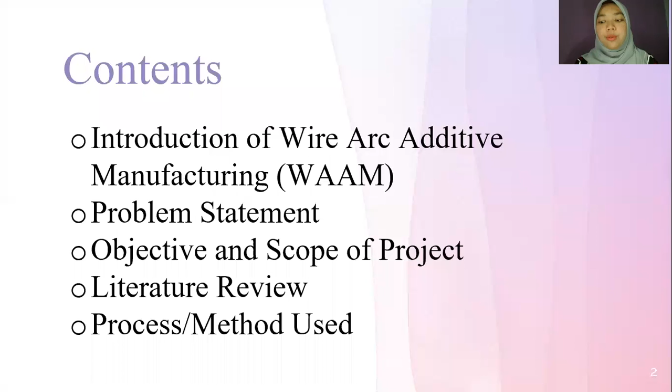This is the introduction. Wire arc additive manufacturing is considered a suitable economical manufacturing process due to its benefit in saving lead time, high deposition rate, high material utilization, and low production and equipment costs. Wire arc additive manufacturing uses metal wire as raw material and an electric arc created through the application of metal inert gas welding, tungsten inert gas welding, and plasma as heat sources.

Wire arc additive manufacturing fuses metal wire layer by layer of molten metal into components to form them by adopting the concept of discretization and deposition. In this project, I have used gas metal arc welding for deposition of 5356 aluminum alloy wire.

Gas metal arc welding is a fast growing welding method due to its high soldering intensity and the decline in post-welding cleaning. The process of part by layer is accomplished by the deposition of the molten metal wire during wire and arc additive manufacture. Thereby, melting of the wire is achieved by the arc welding process.

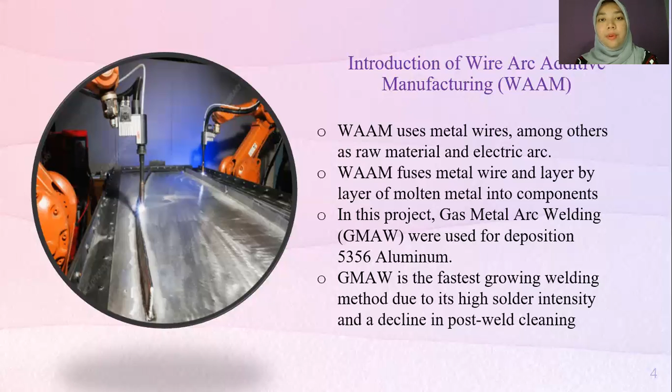Next is problem statement. The first one, in the previous study, deposition of aluminum alloy is done using rapid prototyping technique. Next, defects will have a negative effect on the surface quality and mechanical properties of the finished as-deposited part because of excessive heat.

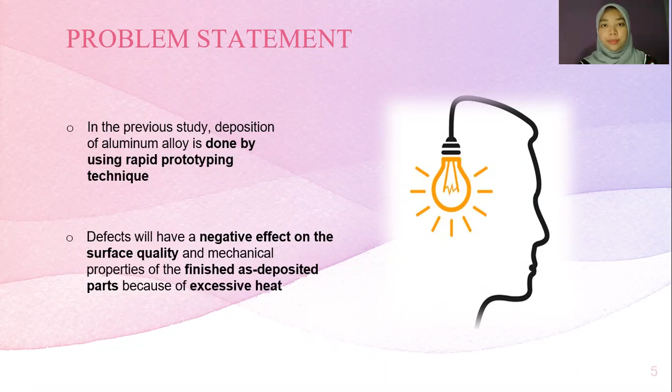So this is the objective of the project. The first one is to investigate the effect of cold arc gas metal arc welding parameters on mechanical properties and microstructure of 5356 aluminum alloy deposit, and to compare between wire and arc additive manufacturing of cold arc and conventional gas metal arc welding.

There were two materials used, a wire 5356 aluminum alloy and a base plate of pure aluminum alloy. The size of base plate used in this project is 100 mm for length, 25 mm for width, and 10 mm for thickness. The wire 5356 aluminum alloy will be deposited on pure aluminum alloy layer by layer, starting from the first layer.

Then 4 samples of layer will be recorded, which are layer 3, layer 5, layer 7, and layer 9. To identify the mechanical and microstructure properties, hardness test and secondary dendrite arm spacing will be used.

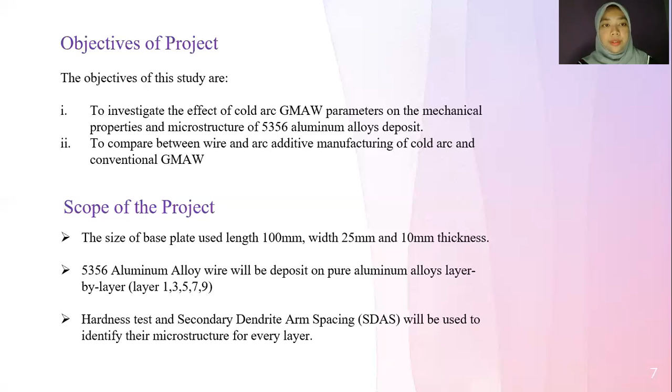Next is literature review. There are some articles that I found from the internet, and these are the most related to my topic. The first one is microstructure formation in Waspaloy multi-layer build following direct metal deposition with laser and wire, cited by Hussein et al. 2014.

Next is parameter selection for wire arc additive manufacturing process, cited by L. M. Wahsh et al. 2018. And the effect of gas metal arc welding process on different welding parameters, cited by Izzatul Aini Ibrahim et al. 2012.

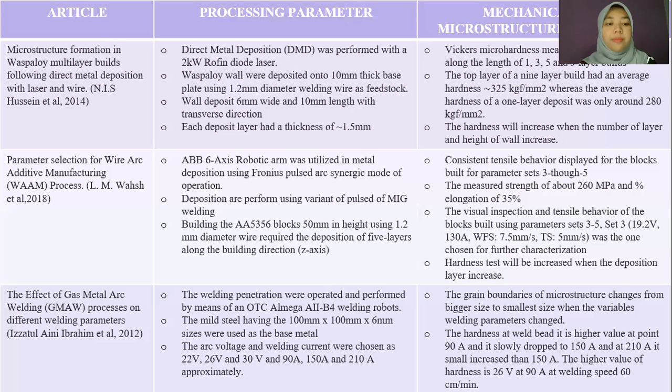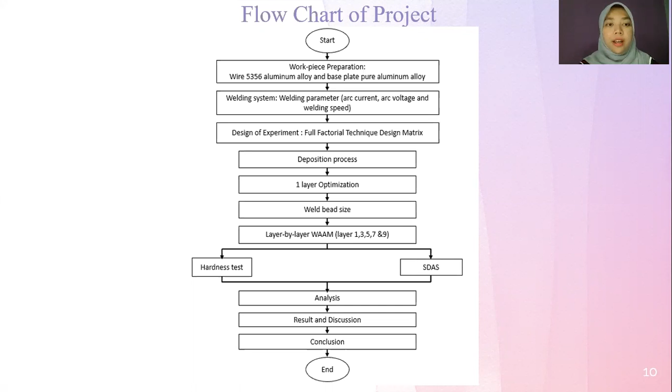Methodology. So this is the flowchart of the project. The first step, I have to identify the material used. The materials used in this project are wire 5356 aluminum alloy and base plate of pure aluminum alloy. This is the chemical composition of the two materials and the mechanical properties of the wire filler and base plate.

The dimension of the base plate that will be used is 100 mm length, 25 mm width, and 10 mm thickness. Before the deposition, base plates were washed in alkaline water and dried in air, which was followed by mechanical cleaning and degreasing with acetone immediately before usage.

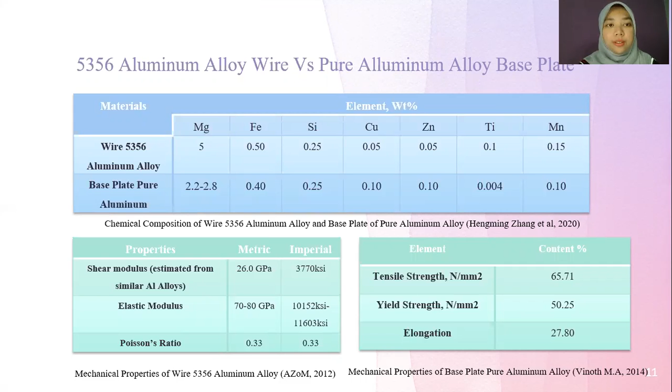Design of experiment. In this project, I have used design of experiment to analyze the data of the experiment. It will be used in analysis to evaluate the optimum welding speed and welding current. It provides a minimum amount of heat input for specific base plate thickness, a particular welding procedure, and minimum electrode diameter. Thus, design of experiment helps planning, screening, optimization, and verification.

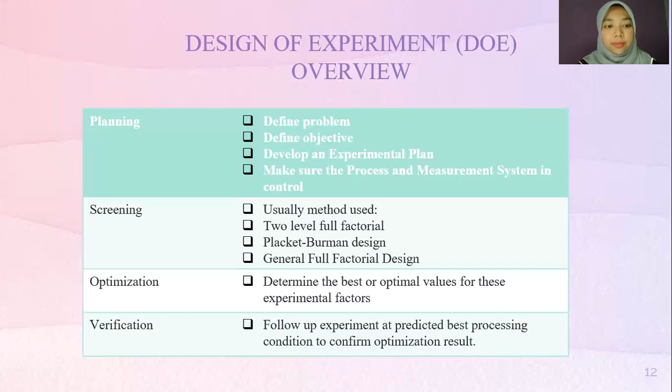To get the analysis, I use Minitab software to generate the data. There are three methods that can be used for design matrix, which are full factorial, Taguchi method, and response surface method. I chose to use the full factorial method because factorial design allows study of interaction between factors.

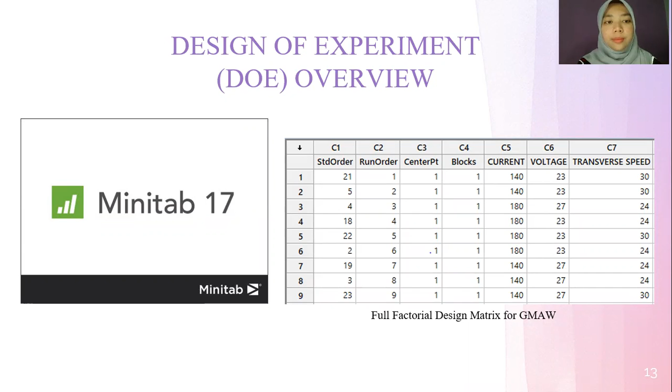In a full factorial experiment, responses are measured at all combinations of experiment factor levels. In my project, for the full factorial optimization of 5 samples, arc voltage, arc current, and welding speed have been chosen as input parameters, and weld width of deposition is selected as output parameter.

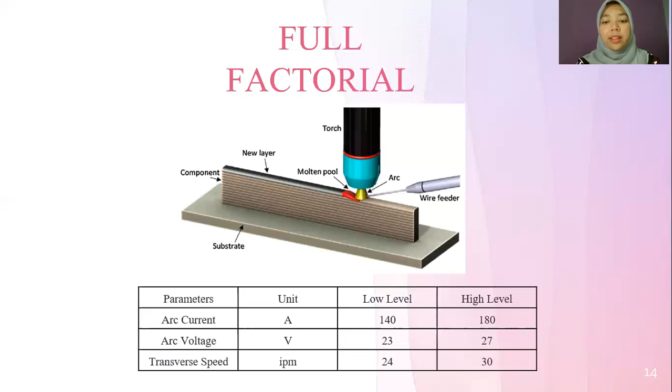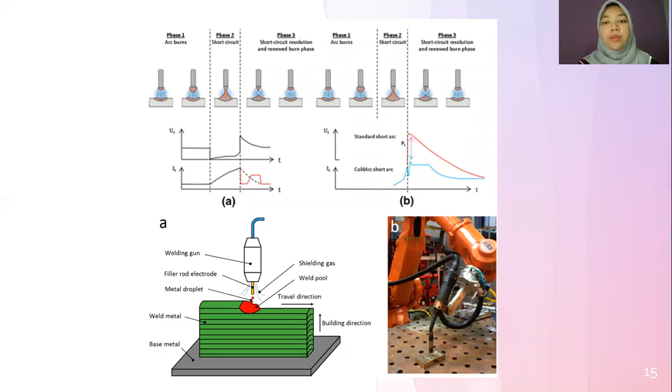In the previous study, most articles covered deposition of aluminium using conventional additive manufacturing, while in my study, I will use cold arc and compare the result with the conventional technique. Basically, the new metal inert gas and metal active gas welding process takes advantage of a new type of highly dynamic inverter switching combined with very fast digital current control.

For example, the figure compares the waveform of the conventional and the cold arc process. The first two steps are similar to conventional short circuit during the arc burning phase. The electrode approaches the workpiece with the current and voltage maintained at the required steady level. In my experiment, 5 samples were used to build the wall structure by deposition from layer 1, layer 3, layer 5, layer 7, and layer 9.

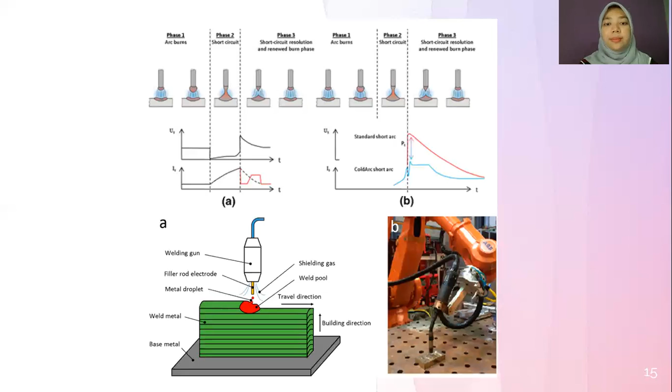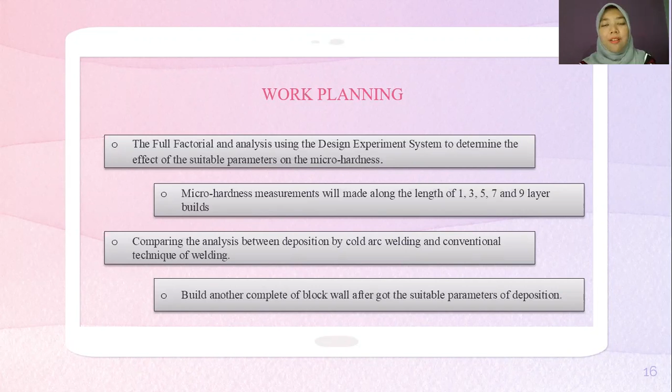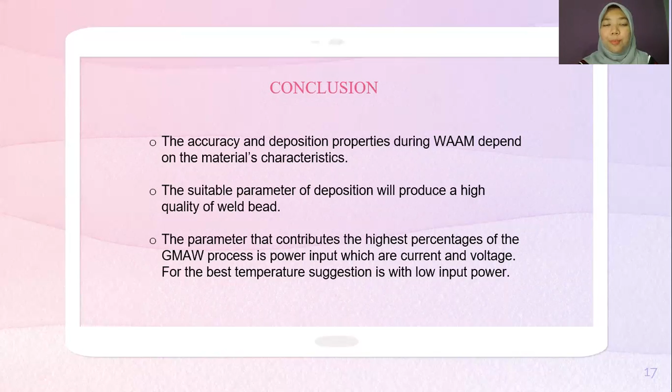As a conclusion, the accuracy and deposition properties during wire arc additive manufacturing depend on material characteristics. The suitable parameters of deposition will produce a high quality weld bead, and the parameter that contributes the highest percentage in the gas metal arc welding process is power input, which is current and voltage. The best temperature suggestion is with low heat input power.

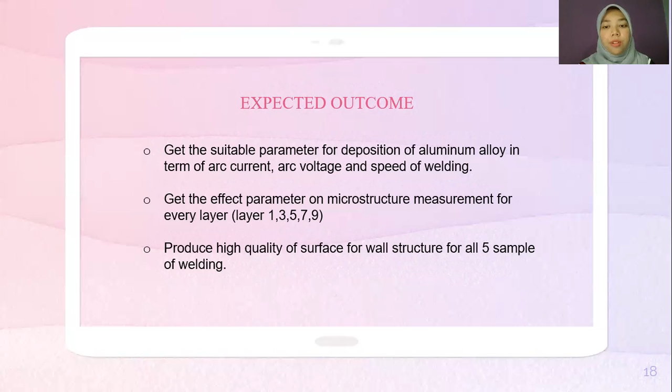My expected outcome is to get the suitable parameters for deposition of aluminum alloy in terms of arc current, arc voltage, and welding speed; get the effect of parameters on microstructure measurement for every layer, which is layer 1, layer 3, layer 5, layer 7, and layer 9; and produce a high quality surface for the wall structure for all 5 welding samples.